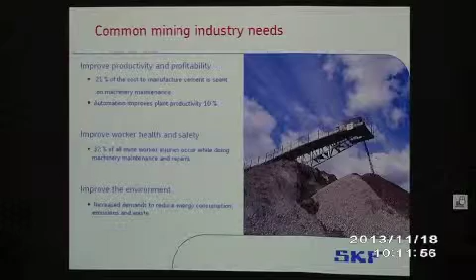So those are some ideas in terms of the real opportunities to help eliminate maintenance costs, and also to improve safety with some of the different tools and products that we have.

In general, these are the industry problems that aggregate, cement, mining, and mineral processing have. Obviously, all the products we're talking about help address these common problems and hopefully overcome them.

The harsh operating conditions, lubrication, reliability - all those things drive up maintenance costs. We have some things that can help reduce those costs.

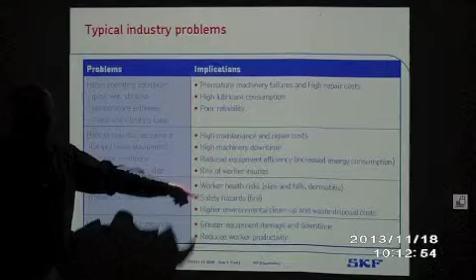Hard to maintain equipment is hard to get at sometimes. Again, there's that injury risk - a lot of guys climbing up on conveyors to change bearings or lubricate them. There's definitely some injury risk there, so if we can eliminate that by using products like this three-barrier solution we're going to talk about, that's a good thing.

High lubricant consumption - there's a ton of it because of the environment they're in: wet, dirty, abrasive, all that stuff. There's definitely high lubrication costs, so there's opportunities to help reduce that, as well as the injury risks and environmental issues, those types of things.

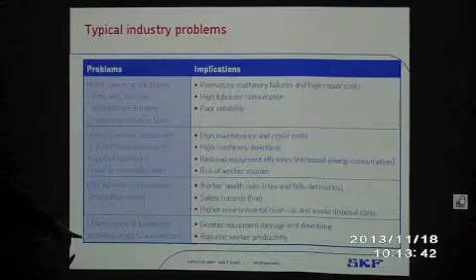Then there's this warning of impending problems, where you could talk about some of the different types of monitoring equipment we have - whether it's the services you guys offer with the reliability program, or our Copperhead system, which is more of an online monitoring system that I'll show you where you can get information on. We'll talk about that a little bit here as well.

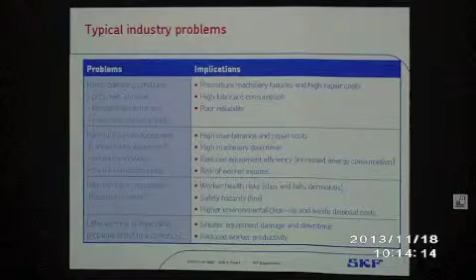Let's look at a few things - I'm going to skip through some of this, but some we'll talk about more, and I'll show you where to get more information. Obviously, there are a lot of different solutions we can bring to the industry. So today was really about not only reviewing the three-barrier solution, but reminding you of all the different things out there for different applications, and showing you where to find that information if it comes up while talking to your customers.

So, we talked about our basic bearing offerings, bearings for the vibrating applications. We have a full line of vibrating screen bearings. I think you guys probably have some of ours in stock, and certainly some other brands as well, but that is certainly an option there.

The seal bearings, that's part of the 3-barrier solution that we're going to talk about. You get the regular double row spherical roller bearing with the seals there, and that's part of that 3-barrier solution we're going to cover.

There's different types of housings out there. In one of the other training classes we did, we went over the Concentra unit roller product as well as the SYAF units, and I'll just touch on that briefly again too, just as a reminder.

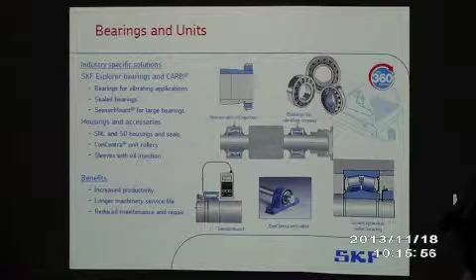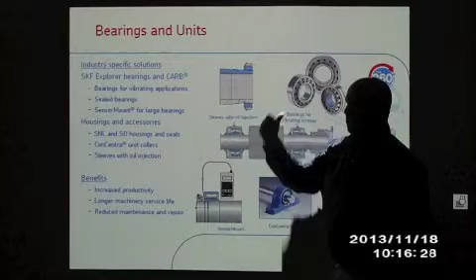Also, as part of the 3-barrier solution, when you get up into the larger sizes, there's also the adapter sleeves that are drilled for hydraulic removal. Basically, you've got an adapter sleeve here, the bearing goes up on it and is mounted right over this groove, and these ports are drilled into it so that when they want to take the bearing off, they just back off the lock nut a little bit and inject hydraulic fluid in here, and the bearing just pops off. So from a removal standpoint, the sleeves with oil injection can be really helpful.

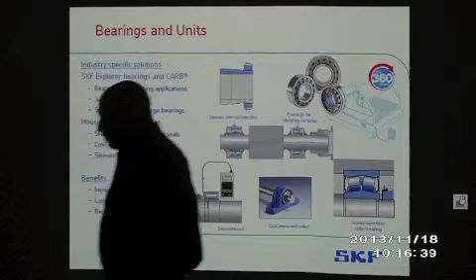And then we've got all the different types of sealing options, both from what used to be CR, that's now the SKF seals. We have the Nilos rings, which for anybody not familiar, are basically an external seal that is, depending on the arrangement, actually run in. There's a groove that's run in either to the inner or outer ring, and it provides an extra level of sealing in harsher environments. We've had this product line for probably a good 15, 20 years.

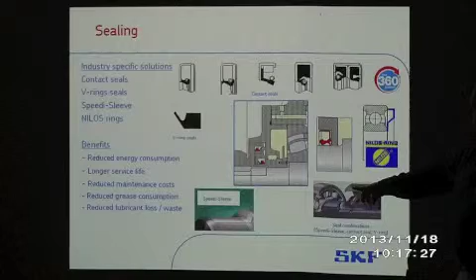The Speedi-Sleeve is basically a product where if you've got seals running directly on a shaft, a lot of times they'll form grooves in the shaft. The Speedi-Sleeve can be used to kind of repair that surface, not necessarily repair it, but cover up that groove so you won't get leakage from your seals there.

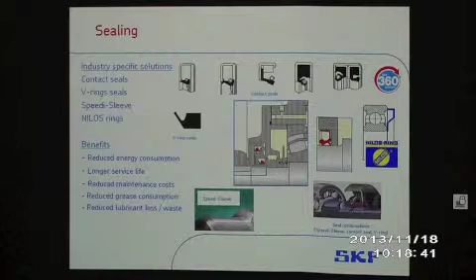The other thing not on this slide, just as a reminder, we have our machine seals group out in Cleveland, which is part of our solution factory. Basically what that group does is take pretty much any type of seal design and either make up a special seal based on the application, or sometimes there's a one-off type seal that's not available, and they can reverse engineer it and hog it out of a plastic tube material. We have about 25 different materials we can make seals out of at the solution factory in Cleveland. They'll create a CAD drawing of a seal, so we could either send them a drawing or send them a seal, they'll make a CAD drawing, load it right into their CNC machine, and hog a seal out in literally a day or so. So there's certainly some opportunities there for sealing in this industry.

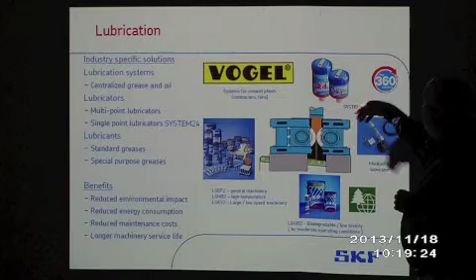Lubrication, we've bought a number of different lubrication companies over the years. So whether it's looking at a type of automatic system, or there's a lot of guys out there using these single point lubricators in different applications. We talked about the idea of safety and things - if they can put these on once a year, for instance, and not have to worry about going up in a hard to reach area or a hazardous area to relubricate, that certainly helps both with grease consumption as well as safety and productivity. So certainly some opportunities there.

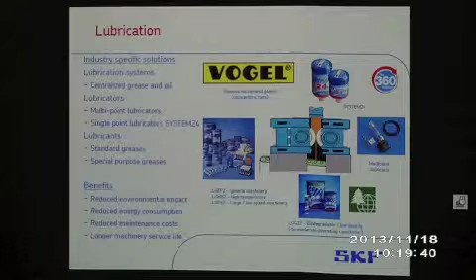And then service, we talked about the idea of the reliability program that you guys offer, certainly from a data collection standpoint. There's also a lot of different types of tools available to make their machine run better, or help with installation. For instance, some different types of alignment tools, whether it's a belt alignment tool or a shaft alignment tool.

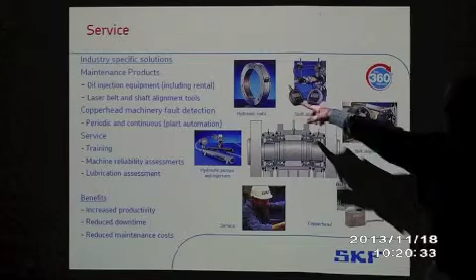We talked about the adapter sleeves there. As you get bigger, having the ports that are drilled for hydraulic removal. We also have these hydraulic nuts that can help actually push the bearing up. Basically, these are pistons that you put in place of the regular nut that would normally be used to push the bearing up an adapter sleeve.

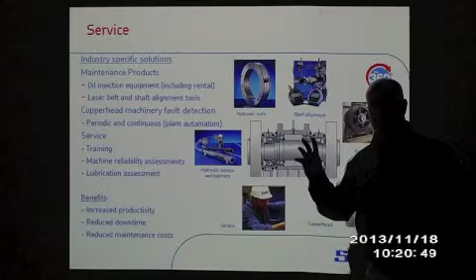When you get from about 4 and 15 up, there's an awful lot of effort that goes into being able to push that bearing up enough and push it up properly to mount it right on the adapter sleeve. So hydraulic nuts, along with the pumps that we have, can help not only increase reliability by making sure it's mounted properly, but it'll save them a lot of time as well.

Copperhead, we're going to show you just some basic information on that in a couple minutes here.

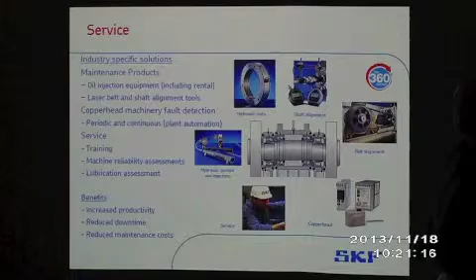So when you kind of look at all the different types of equipment that are out there in the mining and mineral processing industry, we really have some type of product that has features and benefits that are going to help in any of these applications. For the most part, probably you're seeing more in just the basic aggregate - you're seeing conveyors, crushers, and screens probably for the most part. But certainly there's other applications out there that the products can fit into.

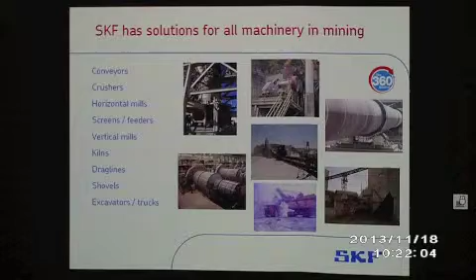I'm going to go up here for a second. So what I'm going to do now is go into PT Place. You guys all have access to PT Place, right? Individual sign-ons or everything? Okay.

I've done this once before, but I thought it was probably a good opportunity to go back and just show you and remind you where you can find an awful lot of information all in one spot.

So this is the basic sign-on here. I'm at the basic sign-in page for PT Place. So if any of you guys go in to sign on, you sign on to the SKF store, this is what you should see first. Is that what you see first, hopefully? Okay.

So if you go into distributor community here, this is basically a site where you as our distributor can go and get a ton of information on just about anything right from here.

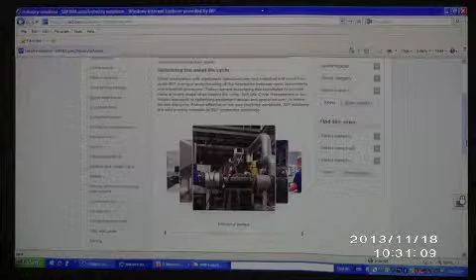I'm gonna work on getting a link for those 360s, hopefully that's set up there. But the idea was that you could pull up any 360 sheet. The 360 sheets are basically one page, front and back, that focus on a particular product or solution for a particular industry. For the mining and mineral processing industry, we have about 6 to 8 360 sheets that you'll have access to, so you can walk into a customer and say, how about this, or do you have this issue, or I have a solution that might help you with this problem. That's what the 360 sheets are set up to do.

Let's see if I have one here. Is anybody not familiar with 360s? I thought they were on your homepage. You seen them, Doug? Yeah, I had them all on. They are, but it looks like they changed the way that they're set up. I used to be able to find them, and I'm not sure why they moved it around a little bit here.

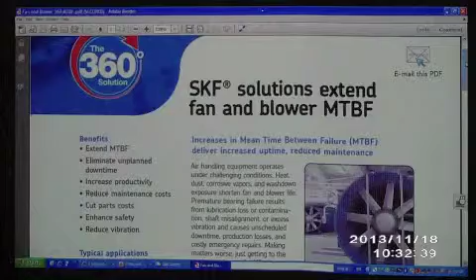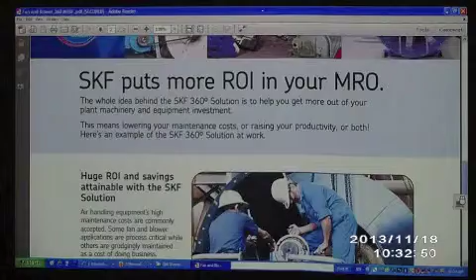Just to give you an idea of what a 360 sheet looks like, for anybody that may not have seen one: for mining and mineral processing, it'll say up here, where it says fans and blowers, it'll say mining and mineral processing. It'll have either a product or a solution for that particular item, a brief description with the benefits, typical applications, and generally some type of story, either a savings story or an increased productivity story about what a particular customer used it for or enjoyed the advantages of. That's what the 360s look like, and that's what you'll have access to for any number of different products in that area.

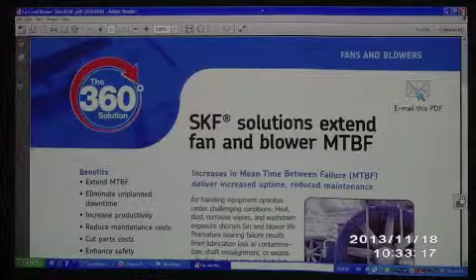Reggie, is that something we should put up on the website? Yeah, we should probably pick some. Pat helped me pick out some on Friday from our book, and Brenda's going to ship those to us. Doug, did you get with her? Good, yeah, perfect. They're pretty easy to read, so that's a big deal, having those on our website as well.

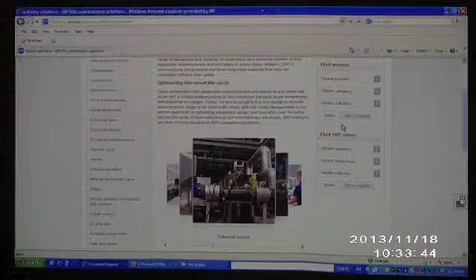Reggie's creating the Flintstone website for us. So are they not on the SKF website currently, Pat? They're out there somewhere, honestly I'm just not sure where. They started, moved them to a different spot, so I will make sure we get you a link or get you to how you can find them.

All right, so I just went into the section here on services, or actually on reference cases. So for instance, if we look at Copperhead, basically what Copperhead is, and I can show you something on it, Copperhead is a monitoring system.

It basically goes right on, say, a shaker, usually on a shaker screen. It goes right on the shaker screen and monitors it constantly. You actually attach sensors to the different bearing housings. Here's a 360 on Copperhead.

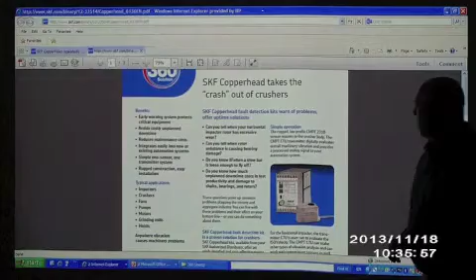They can either have it as a standalone unit, or they can run this package through a PLC. What it does is it enables them to monitor not only bearing faults, but other things that might be happening with the screen, like bad springs or bottoming out. There's a lot of different issues that can occur with the shaker screens, so this allows them to monitor the machinery on a regular basis.

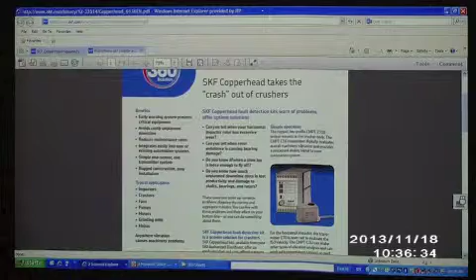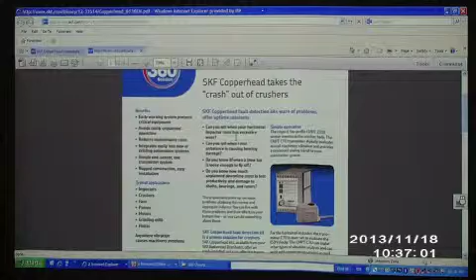So you can see in our first three sentences here, we don't even talk about bearing issues around the screen. Most people, if you try and talk to a customer about this type of system and you lead with 'I have a system that can help you monitor your bearings on your screens,' most of them are going to say, 'I don't have problems with my bearings on my screens.' So it kind of shuts you down quick, but you want to look at some of the other things that affect how the screen operates.

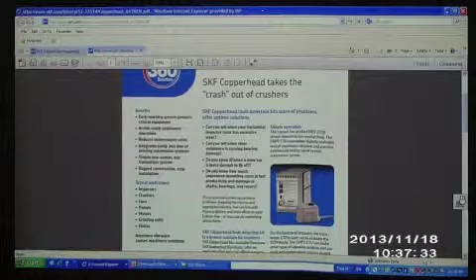Things like the rotor having excessive wear, or a rotor that might cause bearing damage, or if you have a loose blow bar or loose springs. So it's more of a question of, do you have issues with your screens, not necessarily do you have bearing issues with your screens. Because generally there are other issues that are more important than bearings, or that cause them more problems than just the bearings.

So that's the Copperhead. Again, it kind of gives you a one-page overview of what it is.

Just a little story here: a major aggregate producer can't count the number of times this Copperhead system could save their horizontal shaft impactors from failure. They were running this through their PLC system. They'd get an alert, and then they'd go out and make corrections to it before it failed catastrophically, or failed at a time when you're right in the middle of making a run.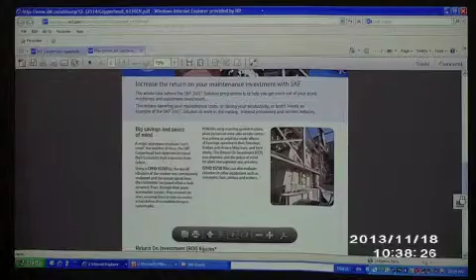And again, you can go in here and look through any number of those different types of cases that are out there for helping with different issues around this particular industry.

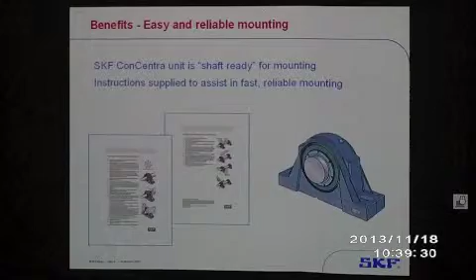Through up to the 3 barrier solution here. And then we can take a little closer look at what actually comes in the 3 barrier solution so that you're comfortable going out and talking about it. I'll come back to that if it makes sense, just to get through that as well.

All right, I'm gonna turn one of these lights on here.

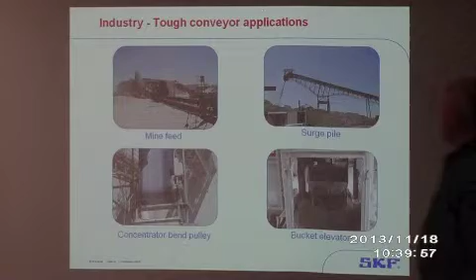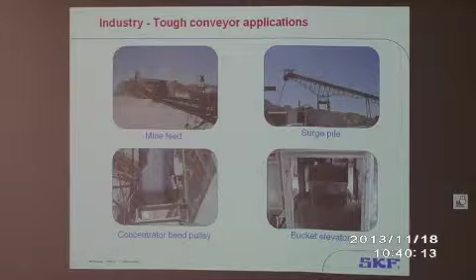So if you recall, when we've talked about the 3 barrier solution, it's basically set up for areas where they're tougher conveyor applications, generally either from a hard to reach area or from a contamination area. So those are just some of the different types of conveyors that you might see the opportunity to maybe put a 3 barrier solution on.

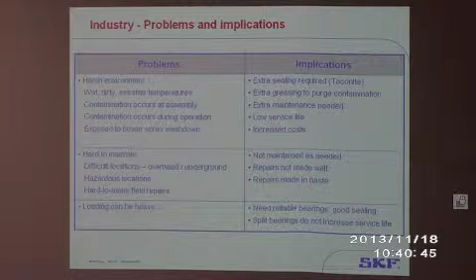And we talked about what are the problems: the harsh environment, hard to maintain, hard to lubricate, all that stuff that goes along with this particular industry in these applications.

The 3 barrier solution: sealed spherical, split pillow block housing, fill the housing with grease, and the PosiTrac Plus seals. So let's talk just a little bit about what your customer would expect to see and what you'll see when you would get a 3 barrier solution.

This, again, we talked about before - this is ordered as a kit, as a kitted part number. I think the handout you have there has the actual part numbers in front of you.

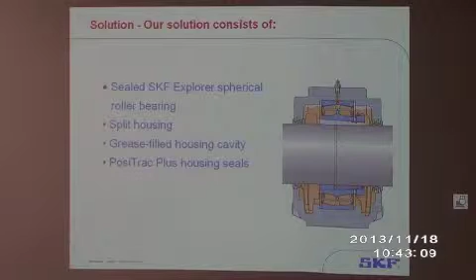So one part number, all self-contained into one box. Now, I will tell you this, we did have a minor issue. Obviously, when we get into larger sizes, we don't necessarily have a box that fits everything. We're supposed to be skidding them and wrapping them into one part number, but we apparently haven't done that consistently. We're working on that. But apparently you guys got in a couple larger sizes that had some that were in individual components rather than the kit as one part number. And I guess one of the warehouse guys said just find a box that can fit that and put it in there. And he grabbed the Timken box and put all our stuff in it and wrote our part number on the outside. So we're working on that, but it's not a huge issue actually, but if you hear that story or hear some issues with packaging, that's what's going on.

So you get the SKF sealed spherical. I don't know that I want to take this out of the box because I would rather not. But you get the SKF sealed spherical, the adapter sleeve assembly, the stab ring and the spacer ring if needed. There is a whole set of instructions in here, which nobody generally reads anyway. And then you get the actual housing.

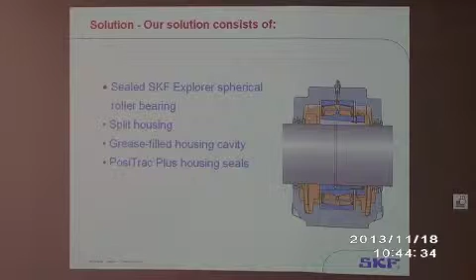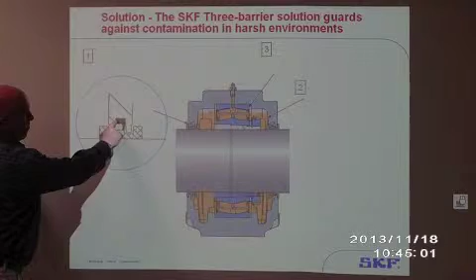Now in here are the basic ring seals, the LOR basic ring seals, but they also get this extra element here, these two elements, which we call the PosiTrac Plus. Basically, the normal pillow block housing just comes with this LOR ring seal here. This PosiTrac Plus is this component that rides on this, that sits in the housing and provides another barrier of contaminant exclusion.

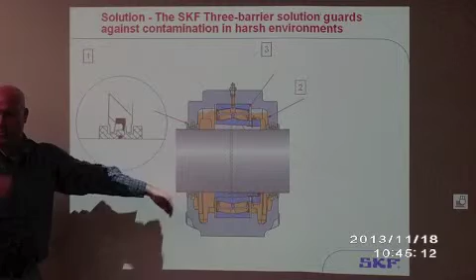You're talking about the double lip seal? Well, sorry, it's the ring seal. Yeah, and then this goes on the middle groove there. Yeah, a lot of the guys weren't here, it used to be that middle groove was the same height as the others, right, a long time ago, yeah.

That's what Glenn's talking about. We used to make this basic ring seal here, called an LER, and all three were the same size across here. But about, probably more than 10 years ago, we redesigned our ring seals and we call them LOR ring seals now. Same dimensions and everything, except that this middle rib here is lower to allow us to put in this rubber contact element and provide extra sealing capacity.

One other note on the ring seals themselves, we also added a little O-ring here on the bore. If the customer says those things are such a hassle, they're a pain, I hate them, just tell them to take them out. Unless they're using oil, they don't need that. We just put that in there in case somebody is running oil, it keeps oil from running out of the housing down the shaft. So if they're running any kind of split pillow block on grease, which everybody we're talking to here is going to be running on grease for this conveyor or this program, you can tell them they don't really need that in there.

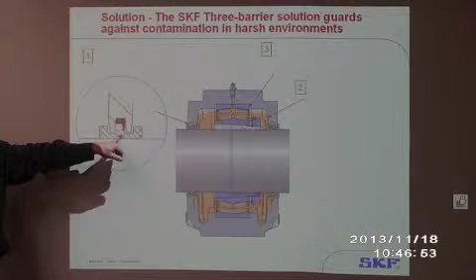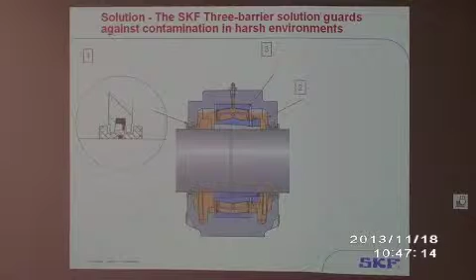When Pat says they're running on grease, guys, in most cases these SAF style, especially whether it's the standard SAF or the 3-barrier solution, they're operating anywhere from 60 RPMs to maximum a couple hundred RPMs in the aggregates. So really heat is not an issue. What you're really trying to do with this grease, and it's sort of counterintuitive, is you're pumping this third barrier, the grease that you're putting into the cavity of the housing, you're actually purging it to keep the crap that's either gotten in, or could get in, out. So it's sort of counterintuitive when you say too much lubricant, too much grease is going to cause friction and heat. In this case it's not, because of the speeds that it's running at, not the temperature.

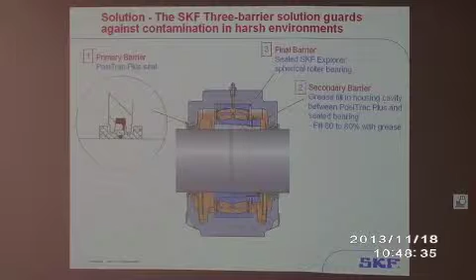So again, just as a review here, the PosiTrac Plus seal on the outside there, filling the cavity of the housing anywhere from 60 to 80%, and then that sealed spherical that's inside there. Again, once they put this on, they're not going to touch it again. They don't have to re-lubricate it. They certainly can put more grease in there if they want and purge it out if they think maybe there's some contamination getting in there. But for the most part, they don't have to. You can see here at the bottom of the housing, they can open this up and purge it out if they want to, but it's not necessary.

Pat, in terms of purging, since this is a relatively new product for you, what would you think about if you said to the customer, if you're doing weekly maintenance, to purge the grease that's in there and refill it anew? I honestly wouldn't know.

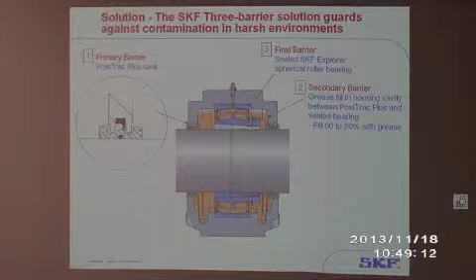Dave from Bell Services. Wouldn't bother? I wouldn't, only because it sort of defeats the idea of what we're telling them, that it's maintenance free, don't worry about this anymore. Particularly on a weekly basis, I wouldn't. Maybe if you want to tell them once a year, on their shutdown, if they want to clean it all out and repack it. I just worry that I'm gonna have a customer who's had a brutal experience look at me and say, bullshit.

It's very possible. It's just like when we came up with our marathon unit for the food industry 10-plus years ago and told them, put it on and don't lubricate it, and they said that'll never work. So yeah, you're definitely fighting a level of, I don't believe you because it's never worked for me before. At that point, sometimes you say, hey, well, if you want to lubricate it, go ahead, it's not gonna hurt anything.

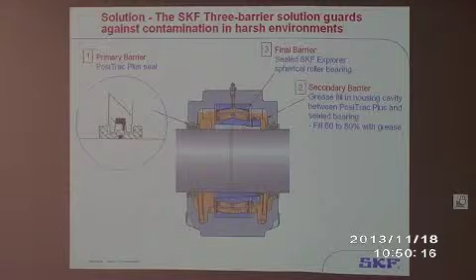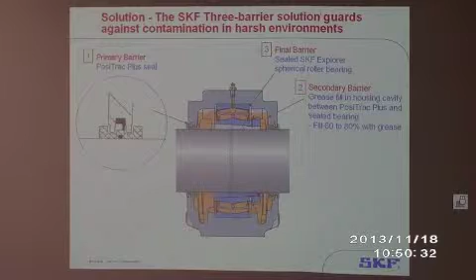So then, it would make sense to me, and correct me if I'm wrong, that if we're gonna fill it 60 to 80% and say it's gonna be maintenance free, would we want them to use an automatic lubricator on that? No, they don't even need to, not at all. We're pushing both automatic lubricators, but it really depends. If you're not gonna change your other setup, well, yeah, go ahead.

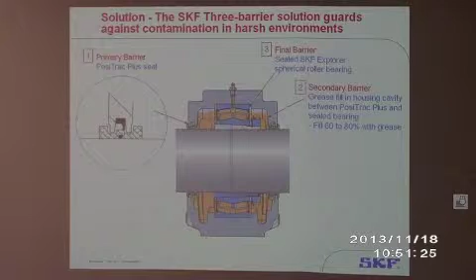Just to give you an idea of where we're looking at this, some of you may know, some may not. Dodge pretty much dominates the aggregate industry with their housings on these conveyors. So these are perfect drop-ins in terms of the base center line height, which is the height from the base up to the center line of the housing, and also the bolt hole spacings. These are perfect drop-ins for any Dodge split pillow block housings, regardless of the bearing they have in there.

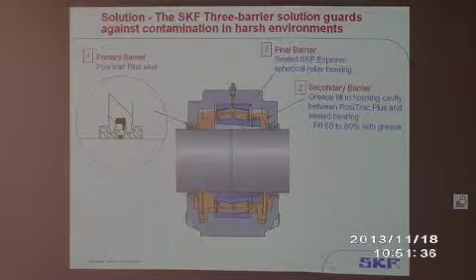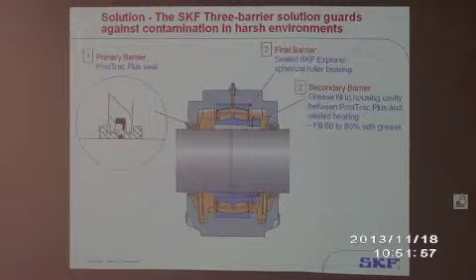Some of the SAFs from Dodge might have spherical roller bearings like we do. Some of them might have tapers in there. But in terms of the load and speed capabilities in these conveyor applications, these are perfect drop-ins. So really it would be focused around looking for those types of housings that we could drop right in here.

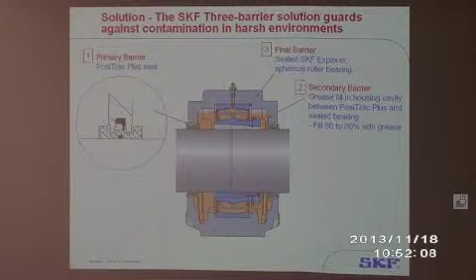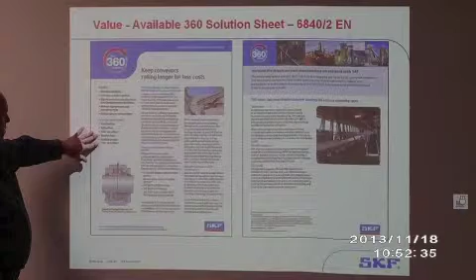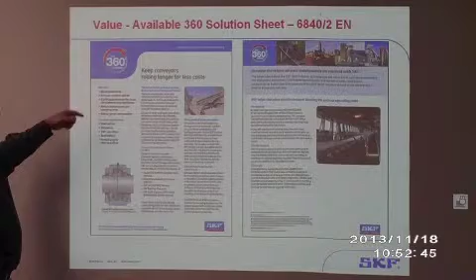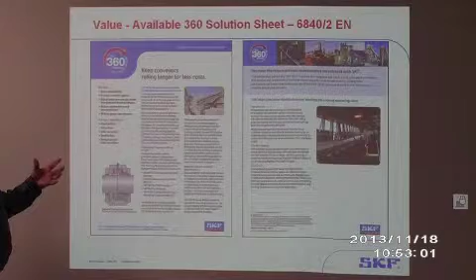And there is a 360 for that. Here's where I said we'll have mining and mineral processing, and then there will be a 360 sheet that goes over exactly what the solution is, what its benefits are, and where the applications are. So for the three barrier or conveyor applications: head pulleys, tail pulleys, take-up pulleys, bend pulleys, and vertical gravity take-up pulleys. So again, pretty much anywhere where you're moving product from one area of the mill or site to another area.

And I'm assuming that you probably ordered this one as well. Make sure I did, I wrote that number down. But yeah, if you did, you definitely want to make sure you have this one included as well.

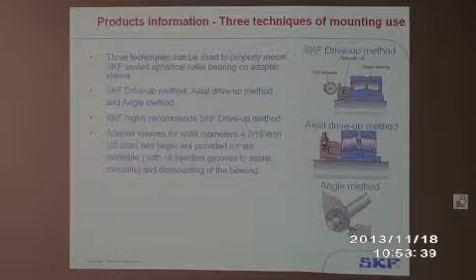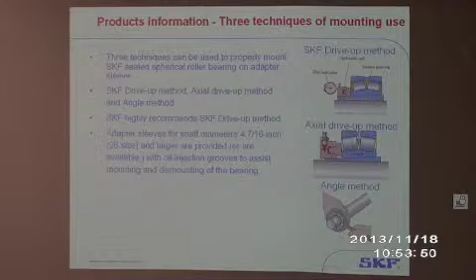Just as a note, normally what you do with a spherical roller bearing is, as you push it up the adapter sleeve, you measure the internal clearance with feeler blades. But the fact that this bearing is sealed means you can't measure the internal clearance with feeler blades.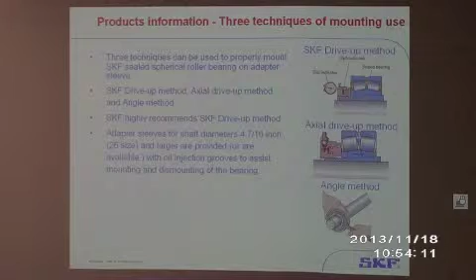So part of the instructions in here actually goes through the different methods for how to mount these bearings. Does it give the end user the amount of torque they need to put on that, or what are the instructions specifically?

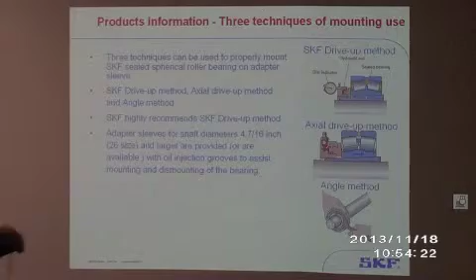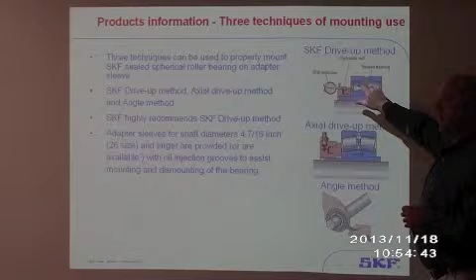These are instructions for these two drive-up methods. Basically, this drive-up method, based on the size of the bearing, uses a hydraulic nut. You use a hydraulic pump that has a digital pressure gauge, and for each bearing size it gives you how much pressure you need to apply to the bearing.

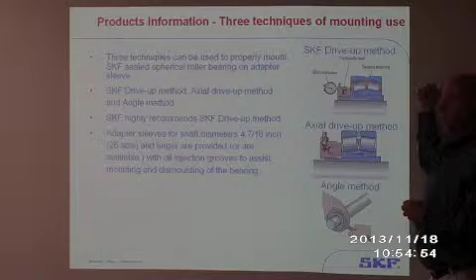Then you zero it out, put a dial indicator on, and it tells you how far you have to push it up the adapter sleeve in order to achieve that. For the smaller sizes, like this one, where you're not going to be using a hydraulic nut, we tell them to use the angle method.

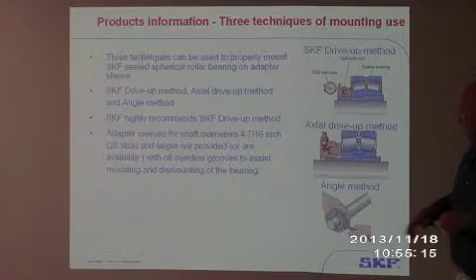Basically, the angle method is when they put the bearing on the adapter sleeve and start to turn the lock nut. You put a screwdriver on the adapter sleeve and you start tightening the lock nut.

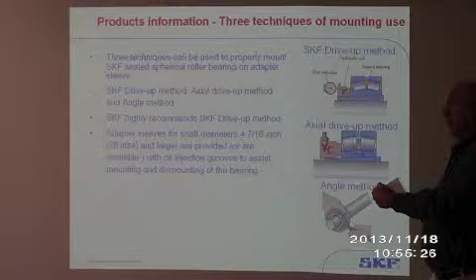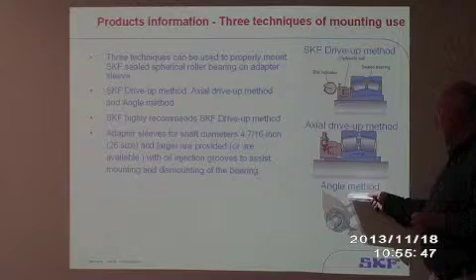Once the lock nut grabs on the adapter sleeve enough that you can't move it with the screwdriver, it kind of sticks on the shaft. Then you go another half turn, 180 degrees, and that achieves the drive-up enough. This angle method is in our installation and maintenance guide, as are the other two methods.

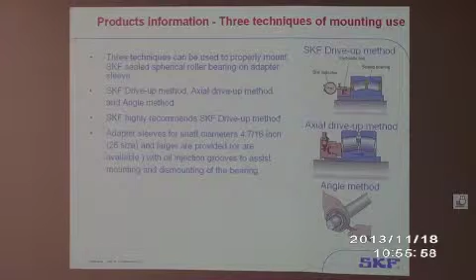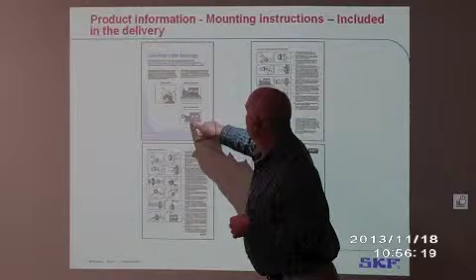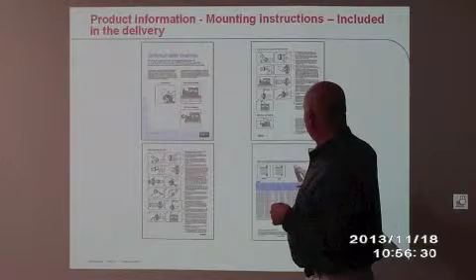This is kind of hard for you to see here, but these are the instructions that are in there. It talks about the three methods: the angle method, the axial drive-up, and the SKF drive-up. This is the whole set of instructions for the axial drive-up, and these are the instructions for the drive-up with the pressure gauge. So they're all right in there.

Hopefully they don't just open up the box and throw the instructions away like most people do, but they are in there. It's always been an issue in my work too - I have problems, like 'honey, where are the instructions?' 'I threw them out.' 'I could've used them.'

All right, so I think we're coming up on just about 11 o'clock. Are there any questions on either the three-barrier or finding that information?

I'll try and get a better way to get to those 360s online if that's important for you. Yeah, I went to the PT place and went through the college again - there's one specifically on finding that, it's actually a good class. Let me go there real quick. Oh, thanks, Craig. Not saying you have to do it, but you do have to pass it, of course.

But anyway, to Craig's point, you guys have probably all taken distributor college classes at some point. There are classes in there on both product and industry, and all of them are about 35 to 45 minutes generally. There's one similar to some of the presentation I did today, giving a basic overview of the industry and some of the different solutions we have for it. It might be a good refresher class, or if you haven't taken it yet going into this program, it might be worth the hour or so - 45 minutes - that it takes to complete.